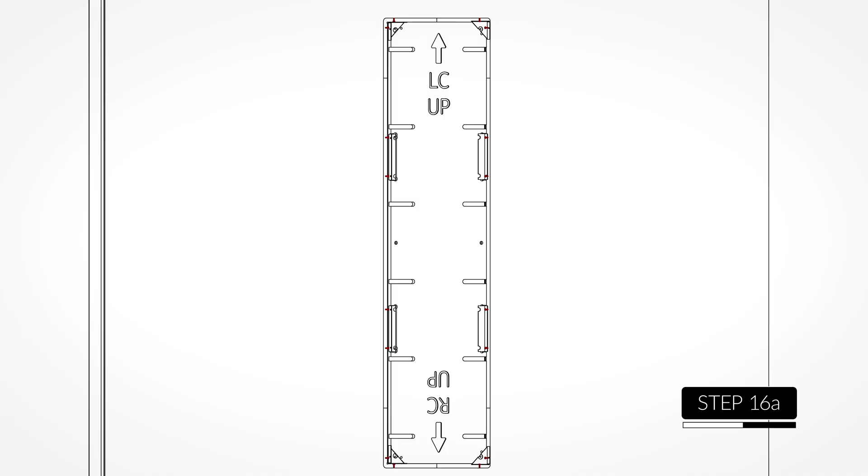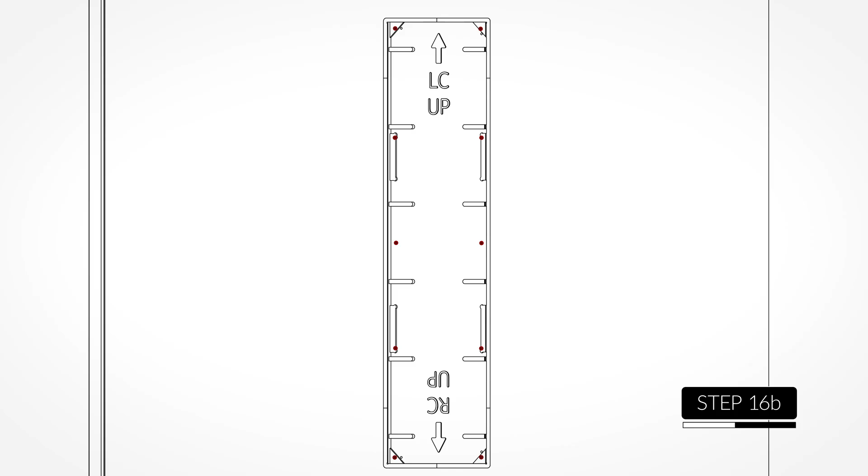Then remove all 10 screws securing the positioning board, and carefully remove it from the back box. Double-check there's no sheetrock mud on the interior edge of the metal and sand it away if there is.

Apply the top and bottom magnetic trim pieces first, then the sides. After that, secure using the supplied machine screws.

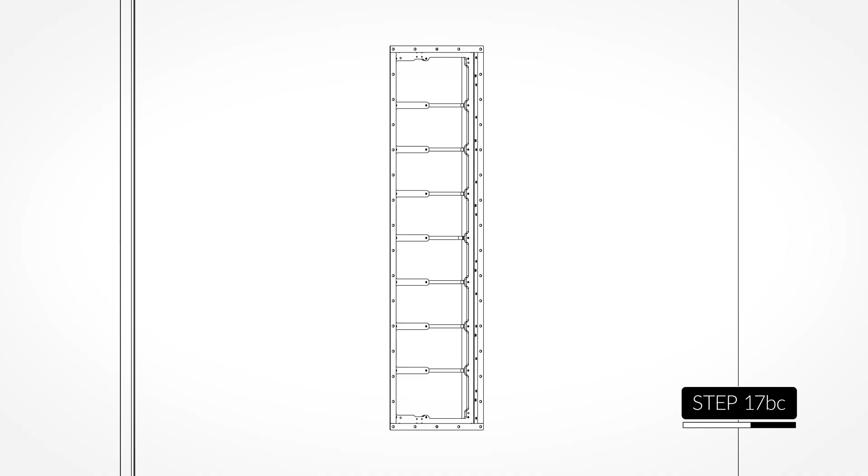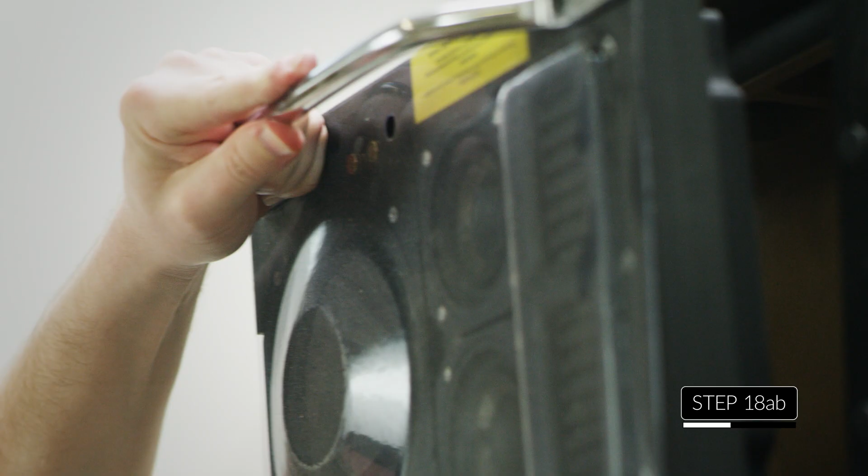Two people now lift the driver assembly from its packaging using the attached handles and carefully seat it into the back box by guiding the alignment pins into the mounting holes on the box. These should go into each of the 4 holes in the corners.

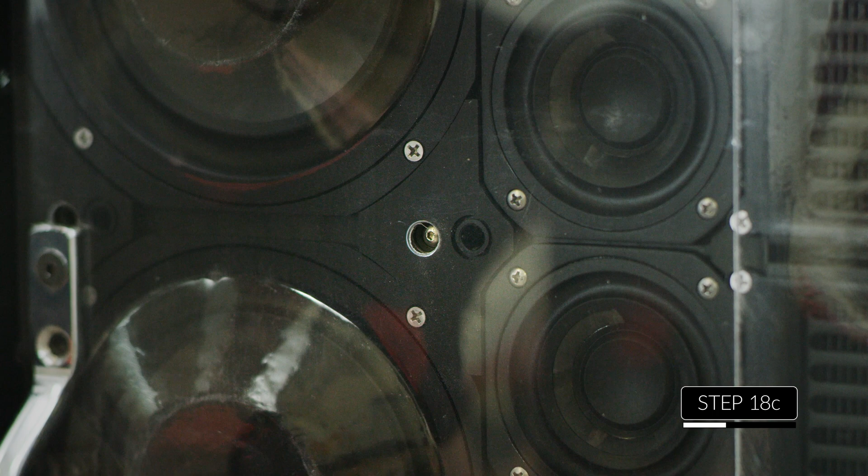While one person holds the assembly securely in place, the other should put the machine screws through the openings in the baffle protector to securely attach the assembly into the back box. Let go only after all the screws have been tightened.

Remove the handles and also the plastic baffle protector. Now secure the screws in the places that were previously covered by the handles. There will be 27 total, including these.

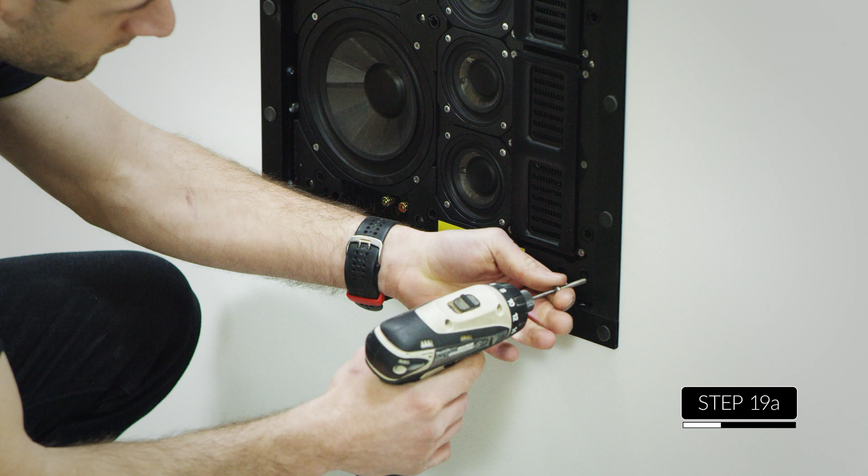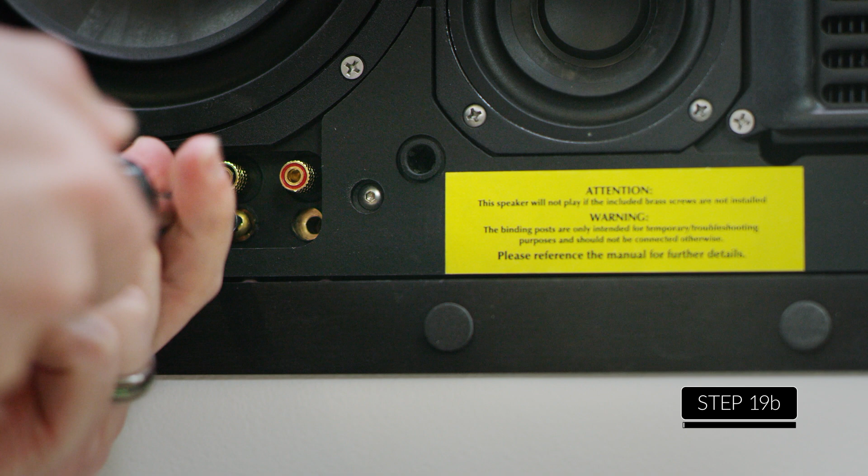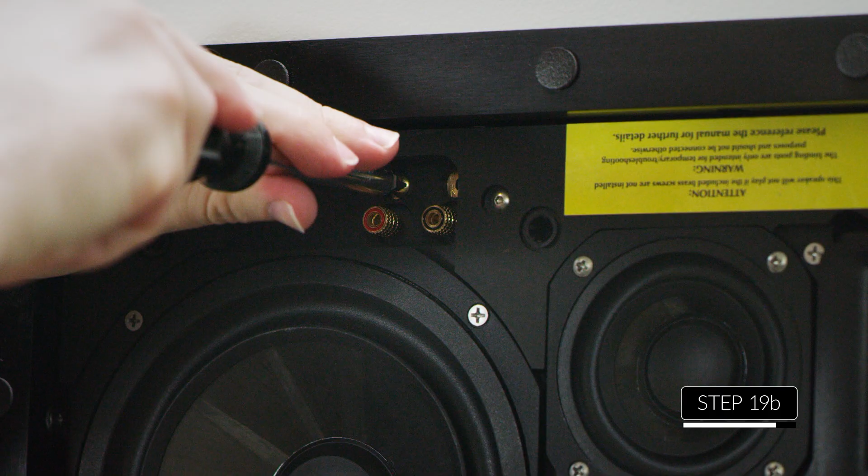In order to establish the electrical connection between the back box and the driver assembly, please insert the included brass contact screws using a Phillips screwdriver. There are a total of 4 of these that need to be installed, 2 on top and 2 on bottom. The holes are directly above the top bass driver and directly below the bottom bass driver. If these screws are not inserted, the speaker will be unable to play.

You may notice binding posts located on the front of the driver assembly. These are just for troubleshooting purposes, not normal operation, and can otherwise be ignored.

Carefully align the front baffle trim over the drivers and press firmly into place. Use the included badge application template to attach the MartinLogan logo to the front baffle trim. This step is completely optional, but it sure does look cool.

If you want to use your speaker grille, gently place it over the front baffle and around the trim. It should snap into place with the magnets.

Congratulations! At this point, you've wrapped up the installation for your Statement 40XW, and now it's time to enjoy them. The break-in period is about 72 hours. After 72 hours, you will notice an increase in bass output.